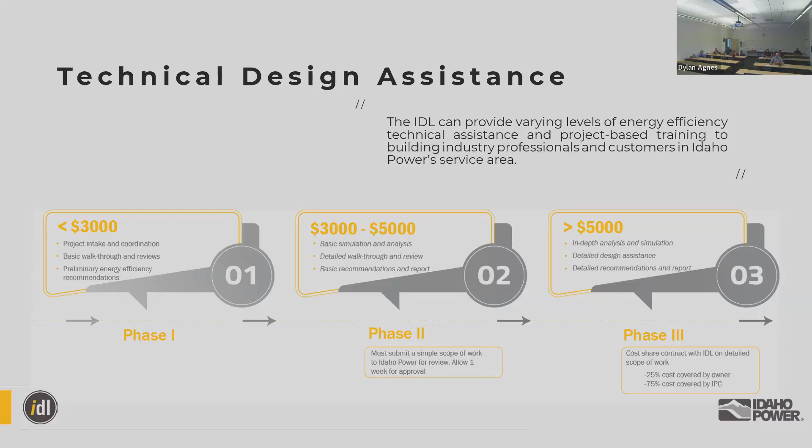$3,000 to $5,000, that's when we need to check in with Idaho Power to make sure it fits within their scope. We send that kind of scope of work to them. They give us the thumbs up or thumbs down within 1 week, and then we get to work on the project to help you on maybe doing something with ComStock or an energy efficiency analysis. More than $5,000 worth of our time, we want to make sure that the client has some skin in the game. And so there's a cost share where the client will pay 25%, but Idaho Power will cover 75% of our time. It's a great resource available to anybody in Idaho Power service territory.

But then Idaho Power, they've also got their own programs. Sri, I'm sorry, you're eating a sandwich. But if you wanted to mention anything above and beyond the regular commercial and industrial programs that you can find online on idahopower.com/business. And just reach out to me if you got any questions. We do have a new home building program as well. So if you want to talk about that,

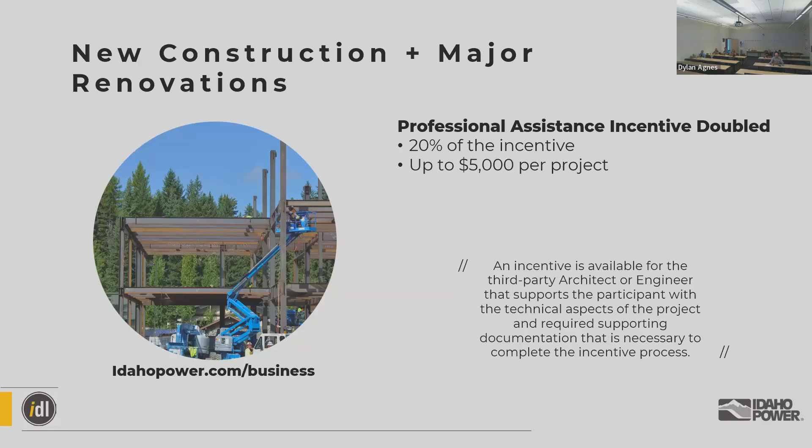Great. All right, and I will move us past this intro stuff so that we can get to the main presentation. So let me stop share here. And Eric, I'll let you start to get set up. If this turns on, and then switch to HD. And then share my screen again. Not showing that screen as an option to share. Hang on just a second. Okay. It's showing PowerPoint. Hang on. For the folks online, are you seeing the National Laboratory of the Rockies intro slide or just a big U of I logo? Just the logo. The logo? Yes. Well, that's okay.

Dylan, if you can assist here real quick while I introduce Eric. So Eric Ringgold is a longtime supporter of BSUG, so we're happy to have him back. You've encouraged us to be more tech savvy and to actually work on scripting. You gave a presentation on that before, and it was very influential for me in trying to remove the intimidation that can occur with scripting. Sometimes you just need to start trying, right? And you increase your expertise as you go along.

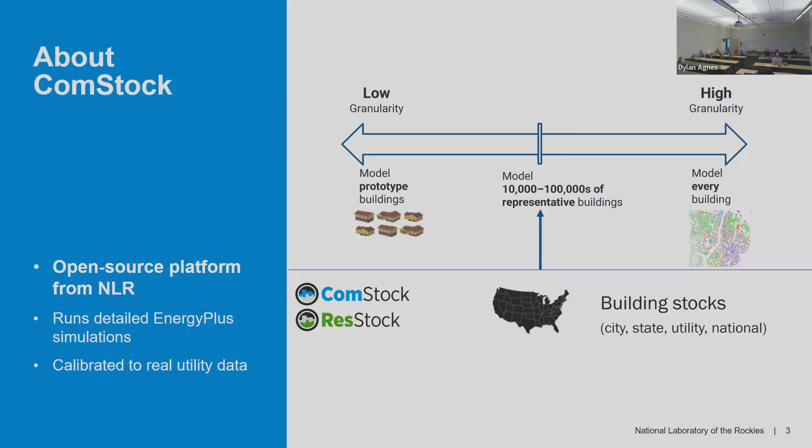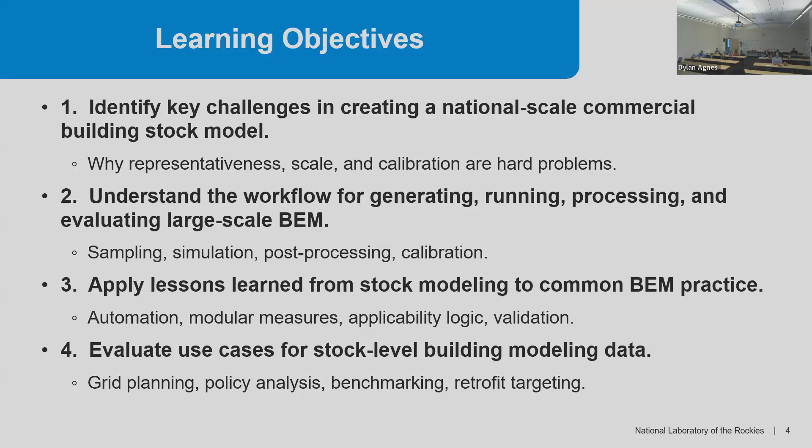Basically, we end up with about 150,000 representative building models that represent the entire building stock to strike that balance. So quick run of learning objectives for the presentation: we'll identify key challenges in creating this national scale building stock model, understand the workflow for generating, running, and processing the models, evaluate the lessons learned, and some use cases for modeling data.

So the starting point for all of this is stock characterization. We need to know what the building stock is in order to model it. So again, we take a bottom-up approach of modeling the stock using available data to characterize or get all of the building characteristics.

Of course, in real life, there are 6 million commercial buildings in the United States. We don't know most of the characteristics about all of those specific buildings, but we do have a sense for what the distribution of those characteristics are from the various source data that we have. So we represent those 6 million buildings by 150,000 models, by first binning the characteristics that we would input into the models, and then creating probability distributions of those characteristics at those bins.

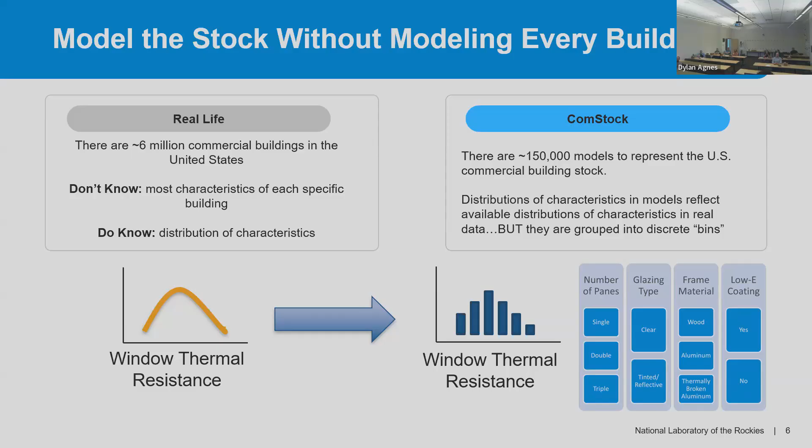So for example, for exterior windows, there's a whole range of window thermal resistances out there, but we can represent those as chunks of thermal resistances, with a probability that a particular building would have that particular thermal resistance. Think about that as one building characteristic, and we're doing that with all the building characteristics necessary for generating models.

These are just a quick overview of some of the data sources we use for this. The big one is CBECS, also American Community Survey, which helps tell us what building types exist, what their vintages are, HVAC systems, and then some of the energy truth data mainly comes from CBECS, commercial real estate, or Department of Homeland Security data.

We use proprietary commercial real estate CoStar data, which is basically every commercial building that could be bought or sold. So we get a lot of commercial information there, mostly around floor areas, sizes of buildings, types, and then where they are in the country.

The buildings that aren't bought and sold, things like hospitals or schools, a lot of that comes from Department of Homeland Security. They have infrastructure data based on those types of buildings. So we compile all that together to get this information on size of buildings and where they are.

Of course, building energy codes and standards give us what envelope thermal performance should be, system efficiencies, and since those are set at various points in time, we can compare those to the vintages we have and get a sense for the characteristics of buildings from those vintages.

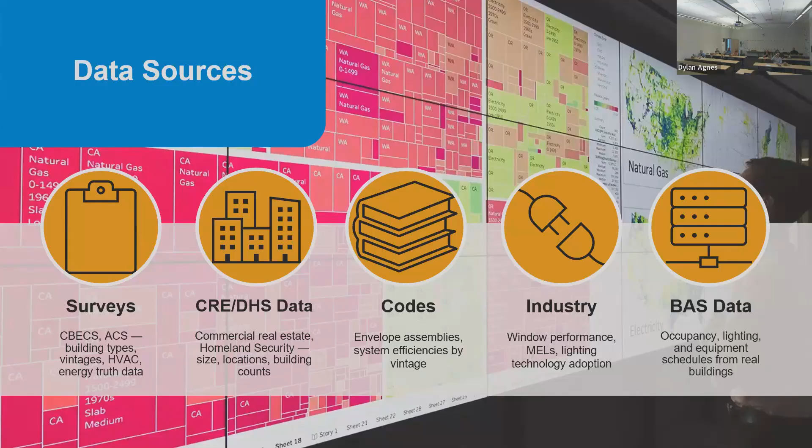So we take all of that data and create for each of these characteristics probability distributions that have dependencies. So we can start off at the climate zone region, and from climate zones we can sample what counties are in those climate zones.

For each county, we have a distribution of the building types that exist there, again from that real estate data, and then based on the type, we can generate probability distributions of vintage, square footage, number of stories, and a bunch of downstream characteristics from those things.

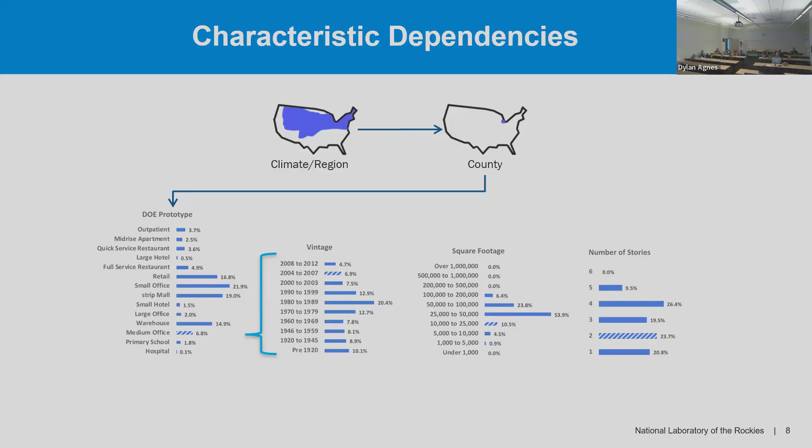Instead we break that stuff down into an energy code following, during last replacement, sort of input for each of those major load types. And that's important to then populate all of the details of the model from that. So we just identify here's the energy code that would have been in place at the last time the HVAC system was replaced.

And given that, as well as the HVAC system, we can look up the reference or actual parameters on system efficiency, system controls, etc, and populate the models with that. So this reduces the input burden a little bit by having those templates to follow in generating that performance data.

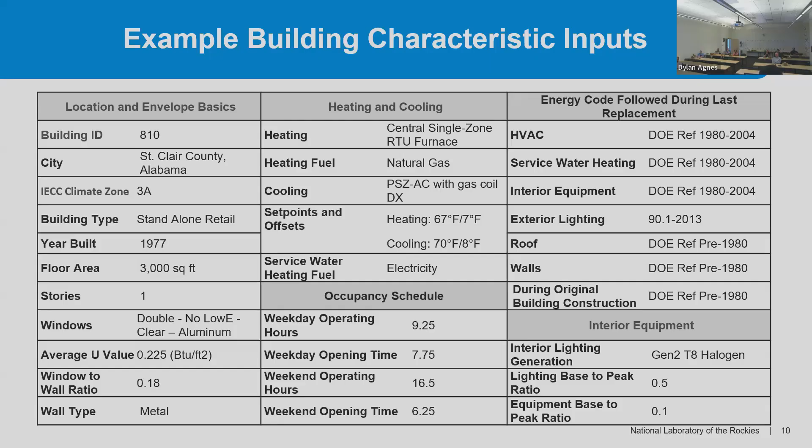Also note we have occupancy schedule information broken down to weekday and weekend operating hours and start time, and that's important for adjusting the schedule of the buildings. Again, we don't need anything more than that because the downstream code can take that to populate the whole building.

So that sets the input - sorry, I'm trying to go fast here to make up for some time.

So we take that input and then we need to build runnable Energy Plus models with those. The model creation process, at a high level, is fairly simple.

We have the BuildStock CSV, which is a CSV of that input where one row is a building, with columns for each of the major characteristics. That's paired with the options lookup TSV, which is like the recipe book index. It's where you can find the specific set of instructions for making each menu item, where the menu items are defined in the BuildStock CSV.

Both sets of information are given to this measure, build existing model, which you can think of as the chef. It takes those instructions and what they're supposed to be building or making, and turns that into a fully featured baseline OpenStudio model, which can then be run as an Energy Plus model.

When we apply model upgrades, which is an important part of what we're doing with ComStock, we have a separate companion chef, apply upgrade, that takes the output model from build existing model as well as the characteristics from the options lookup, which have the full characteristics of all baseline and upgrade options, and then modifies the building in specific ways to create the upgrade model.

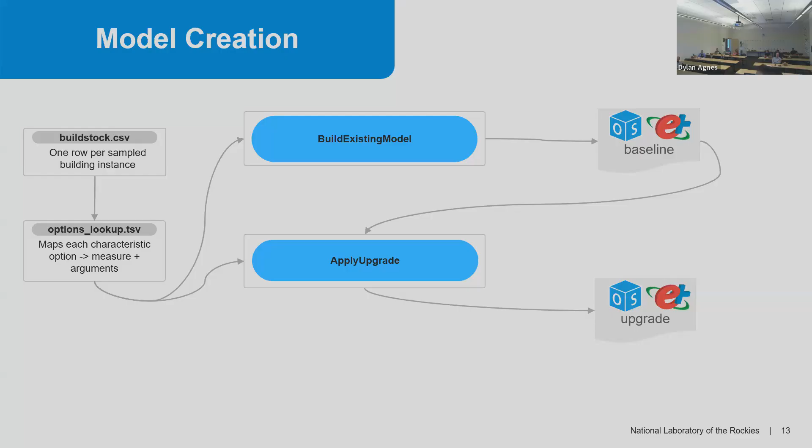In reality, so at this high level it's pretty simple, but it gets a lot more complicated when you look into the individual steps. The chef measures are really orchestrating this whole team of sous chefs, each tasked with a specific job. Each of these is a sub-measure that does a specific thing in building the model.

For example, the building location information, the weather, the design conditions, and site conditions are set in one measure. Simulation settings are tweaked in another. The building geometry is created, and the building is populated with internal loads, systems, and controls in the create typical building from model measure. Then inputs are adjusted with each of those, like set HVAC templates or roof template. Those additional measures will then change the building in specific ways.

Similarly for apply upgrade, we have a large suite of upgrade measures for ComStock—I think it's in the dozens right now—that make specific modifications to the built baseline energy model, again with their options provided by the options lookup. The individual upgrade measures determine, based on characteristics from the baseline model, if they should even apply. So there's a whole set of applicability checks baked into those measures to say, does it make sense to try to apply this modification to that model?

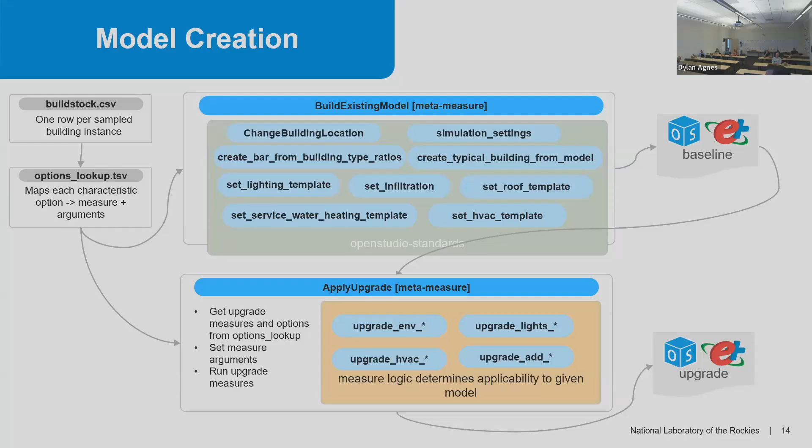Most of the code from these individual measures actually comes from Open Studio Standards, which has the worker functions to create these model instances and populate them with this data. That's really where the bulk of the actual model building is done—in this Open Studio Standards Ruby gem that exists and can be used for all sorts of things, not just this model articulation kind of stuff.

Open source code—all right, so that was really quick overview about building the models, but there's a lot to it.

This gets pretty technical, I would say, but essentially what we're doing is we take the simulations that we've run, and we have the truth data about all of the commercial buildings that we know exist in the country. But we don't know everything about those, such as the major segment variables, fuel type and HVAC system type. We don't know them for all of 6 million. So we have to impute what those are and then match them with specific models that we've run. So this describes that process.

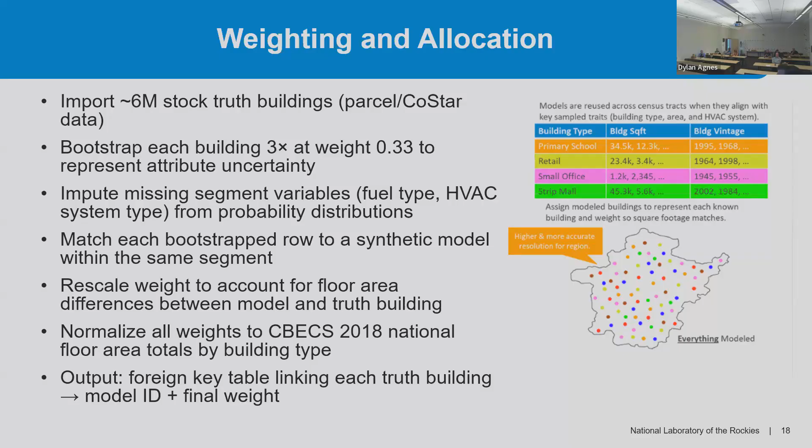We also take detailed calibration approaches or calibration checks that we do every time we make a data set release. Actually, every time that we make a baseline modification, we're doing these high-level comparisons to CBECS data. For these comparison plots, CBECS releases energy use by building for their whole data set. That energy use comes with some error bars, so we represent those total uncertainty ranges on the CBECS bars in green, and plot the ComStock results segmented by building type, by fuel type, and by census division, and we do end use as well.

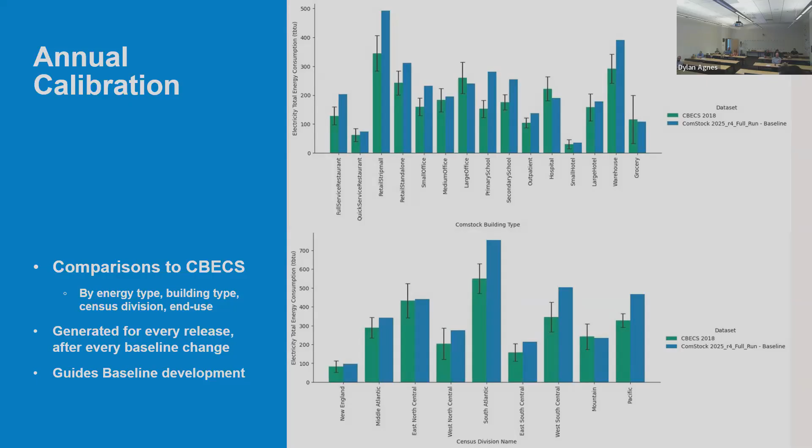Although I should note, the end use energy published by CBECS is itself modeled, and I think some of the assumptions that EIA makes in modeling those end uses come from ComStock. So it's a little bit of a circular thing to compare against those end uses, but this is really instructive from a model calibration approach, and when we're making baseline adjustments, to see what segments we are doing well on, what might need work, and then think about what about our models could be improved, either in the models themselves, in the sampling approach, or in the weighting and allocation approach. There are many places at which we can apply the learnings from the calibration.

And that extends to time series calibration as well. So we make these AMI comparisons based on anonymized, aggregated utility AMI data that we've received from a handful of utilities across the country. And by selecting the equivalent ComStock model geographies for those types, we can create these plots of time series. So the colored end uses are the ComStock data. The black solid and dotted lines are the AMI aggregates and their confidence interval ranges that we can calculate from that data.

One of the difficult things about these AMI comparisons is that there's not a ton of AMI data that we have. So I don't know if you can see the AMI, there's an N equals 7. That is basically the number of comparison meters that we have for this particular geography.

This is in Maine, large office is in Maine. So a fairly small region of a specific building type, not a lot of comparison samples. This is something that we would really like to do more of this type of comparison from. Getting AMI data from utilities can be difficult, and so this was the result of a big calibration effort that was done a few years ago. But then we can continually make these plots to inform sort of where we're doing.

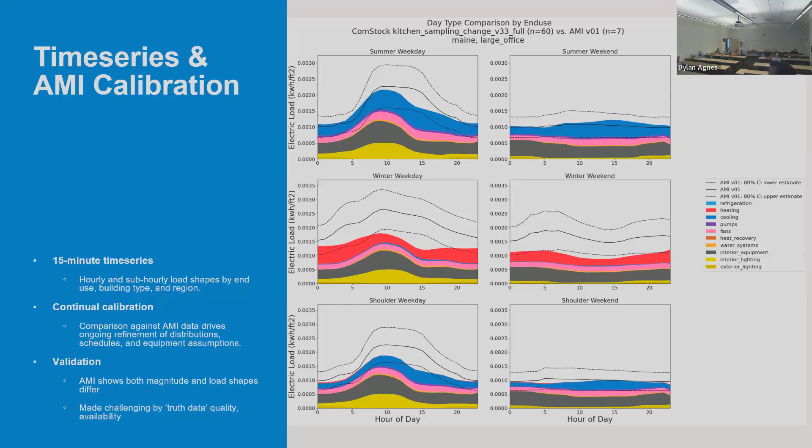This is my plug for utility folks that we're always looking for more utility data, and it really goes a long way in improving the models for the whole country, but really for the service territory that we would have the comparison data for.

Okay, so time doing all right. Bringing this back to BEM practitioners. So that was a lot of high level, in-depth research stuff. So what can this teach you as a BEM practitioner that might help for your workflow?

So the first thing, which gets back to my previous talks at this forum, is automation. So even when running single buildings instead of hundreds of thousands or millions, being able to use an automated, reproducible workflow has huge benefits in terms of time, quality, QA. Even before I joined the lab, when I was working in consulting, I found that this has a ton of benefits. So this means not doing everything over and over again by hand, but sitting down, figuring out what your standard process is, and writing that as instructions for a computer to follow.

The second one is to standardize. So as I was mentioning before, with the apply upgrade measure, we have this list of measures that you just throw at a particular building. The measures themselves contain the know-how as to whether to apply to this particular project or not. So for commercial new construction or retrofit analysis, you might have a standard list of measures, or measures that only apply to a specific building or a specific location.

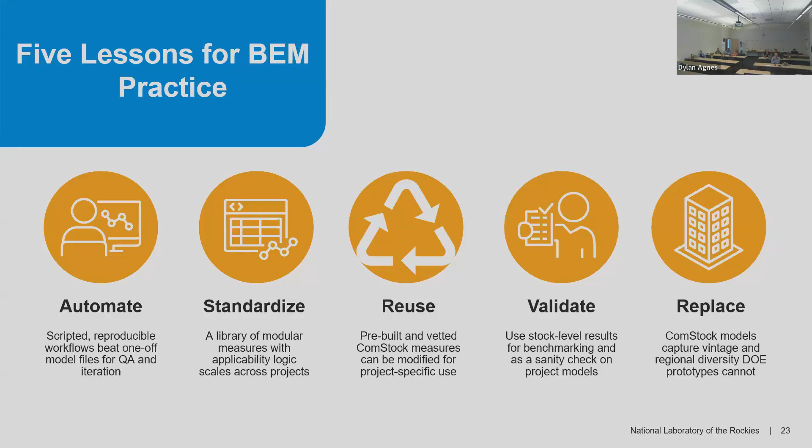Those prototype models can be highly idealized. They have uniform and unrealistic schedules, and I'm pretty sure they follow the standards' allowed, say, lighting power, rather than what you would typically find in buildings. So all of the end models that we generate are also published with our data and can be pulled and used and modified however you would like.

To that end, we have a number of data access pathways. So we publish CSV and Parquet files. There's the annual metadata files at various levels of pre-aggregation. So we do publish files that are aggregated up to the national county level, or all the way to the individual tract level if you want the full, the big ones.

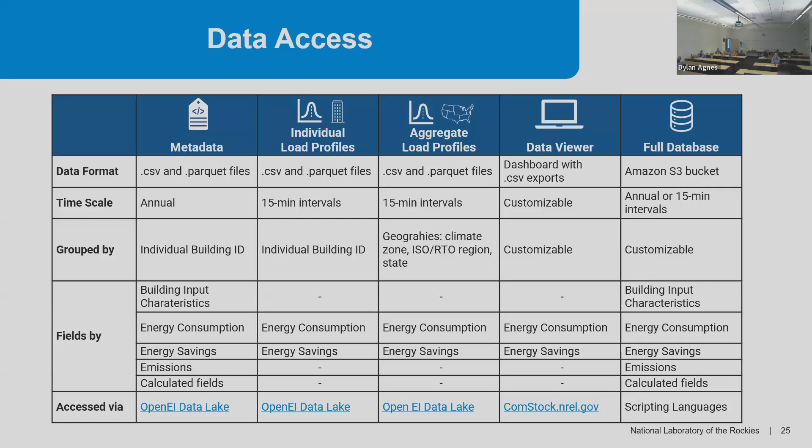We have published individual load profiles and aggregate load profiles, the time series data, and then we have a data viewer, and then everything's up on S3 buckets. So you can set up ways to automate the access to those. We do not have a data access API at the moment, but it's something that has been requested, and we're definitely considering putting it together.

So finally, that all gets into the modeling details, and then you might ask yourself, well, what can we do with all this ComStock data? Not necessarily the models themselves, but stock level building energy data. So one thing it's been used for is climate action plans. The lab worked on this LA 100 study to inform the city of Los Angeles and the LA Department of Water and Power on possible pathways to 100% renewable energy. This was a multi-year project that finished a number of years ago, but was a real initial testing ground for the use of stock level data in this way.

So with ComStock, we can characterize their building stock at a state level, at a utility territory level, identify the segments of the stock that might be addressable with various mitigation measures, and then use that upgrade data to assess what you can expect from the adoption of those measures. Additionally, it can be really useful for grants, rebates, incentive programs, for all of the major end uses for which we have upgrade measures.